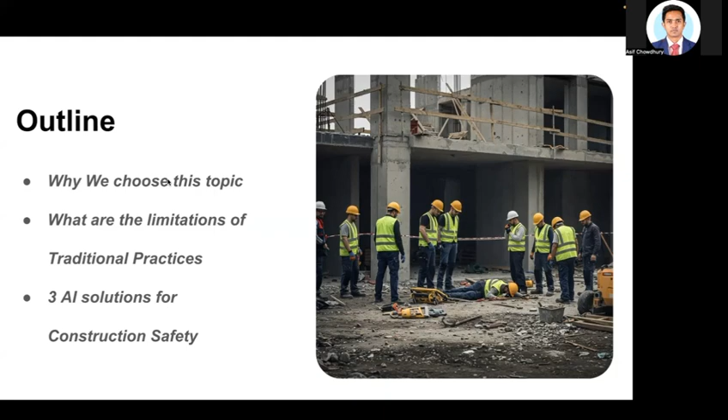In the first part of our presentation, we'll quickly cover why we chose this vital topic, look at the limitations of current traditional safety practices, and then introduce how artificial intelligence presents potential solutions to improve construction safety, particularly concerning fall prevention.

So, why is construction safety so crucial? It's truly non-negotiable for several reasons. Statistically, the construction industry is unfortunately dangerous. It accounts for about 1 in 5 worker deaths in private industry in the United States. Over half of these fatalities stem from what OSHA calls the fatal four: falls, struck-by incidents, electrocutions, and caught-in-between hazards.

Beyond the devastating human cost, the paramount need to protect workers, there are significant financial impacts. Accidents lead to billions in costs from project delays, increased insurance premiums, fines, and legal fees. Safety issues disrupt project integrity, affecting schedules and budgets. Conversely, a strong safety record enhances a company's reputation and builds client trust. The key takeaway here is that proactive safety isn't just ethical, it's fundamental to successful and sustainable construction.

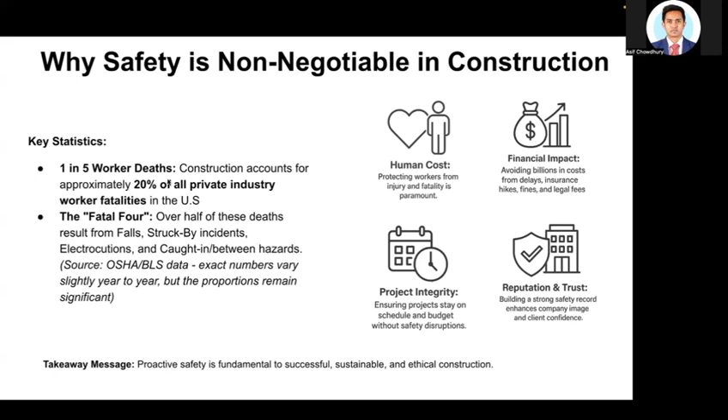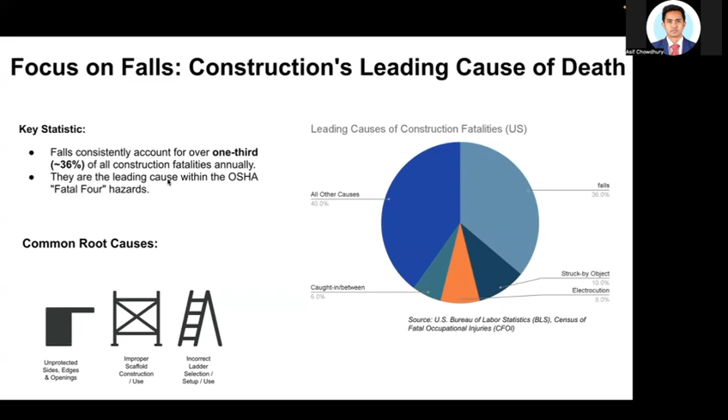Now, the industry isn't starting from zero. Currently, safety methods form an essential foundation. This includes physical barriers like guardrails, manual site inspections using checklists, worker training programs, and the use of personal fall arrest systems, or PFAS. However, these traditional methods have limitations.

Oversight can be inconsistent, manual inspections are prone to human error, and only capture a snapshot in time, not continuous conditions. Training is vital, but doesn't guarantee consistent safe behavior. Furthermore, scaling these manual methods effectively across large dynamic sites and providing real-time hazard identification is incredibly challenging.

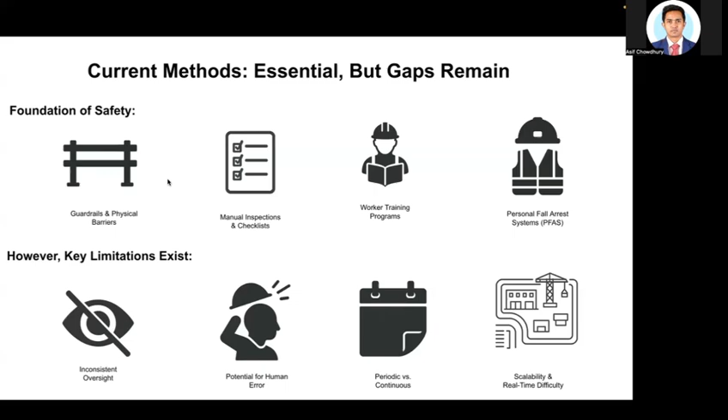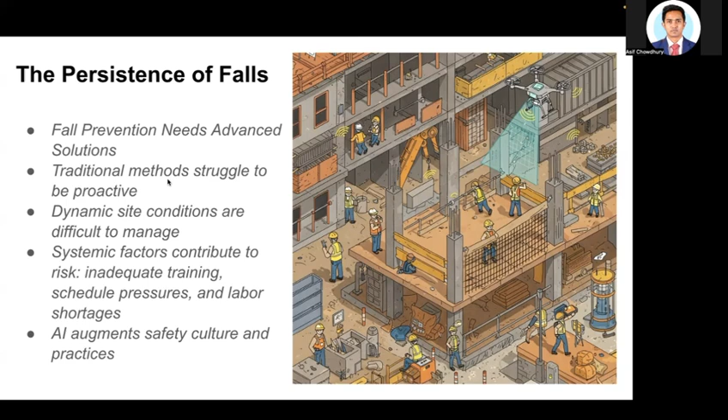Despite current efforts, falls persist. This highlights the need for more advanced proactive solutions. Traditional methods often struggle to anticipate risk before incidents occur, especially on constantly changing construction sites. Systemic factors like inadequate training reinforcement, schedule pressures pushing workers to take shortcuts, and even labor shortages can contribute to the risk. This is where technology like artificial intelligence can play a crucial role, not to replace existing safety culture, but to augment and enhance safety practices.

Artificial intelligence allows for automated, consistent oversight 24/7. The ultimate goal is not to replace safety managers or protocols, but to add a predictive, continuous layer of safety, supplementing traditional methods to proactively prevent falls before they happen.

Having established the critical nature of fall hazards and the need for more advanced solutions, we will now explore the specific artificial intelligence-driven approaches our team has researched, as outlined earlier. I will now hand it over to Mona, who will begin by discussing our first AI solution.

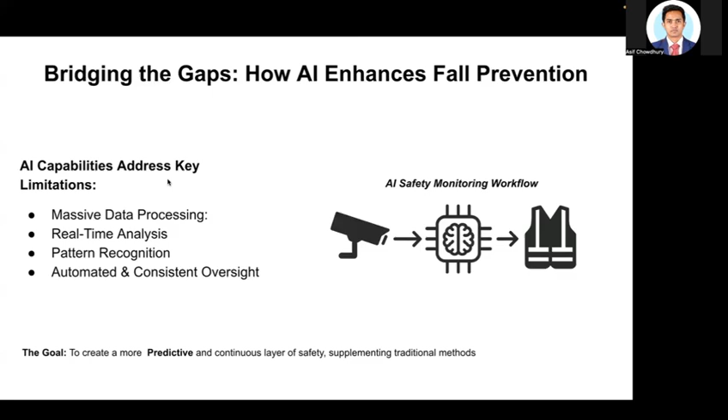Hi everyone, today I'm presenting Everguard AI, a system that's helping to make construction sites safer by using artificial intelligence. Everguard combines technologies like computer vision, wearables, and environmental sensors to actively prevent accidents. Construction is one of the most dangerous industries worldwide, and historically safety has been reactive, investigating after something goes wrong. But nearly 3 million people die each year from work-related causes, and this number shows why proactive systems like Everguard are so important.

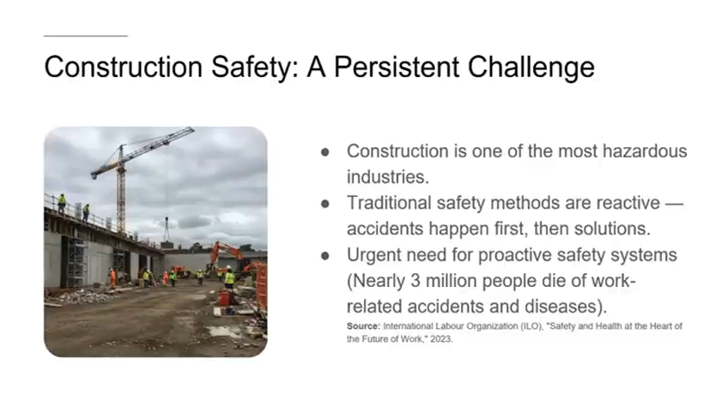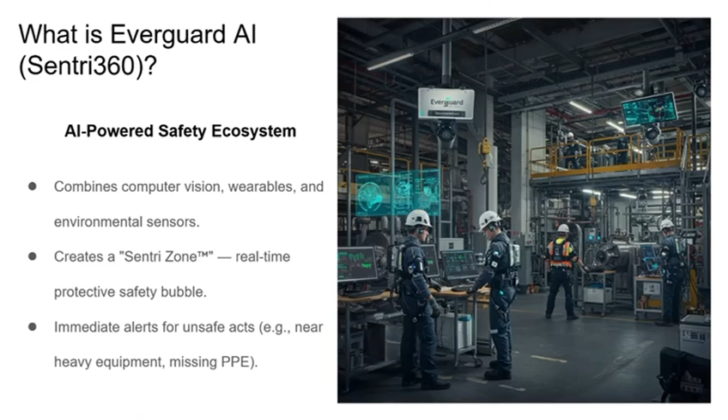Everguard's core platform is called Sentri360. It creates a real-time safety zone around the workers by combining multiple data sources like video feeds, wearable sensors, and environmental inputs. For example, if a worker steps too close to heavy equipment or forgets their PPE, the system instantly detects it and issues an alert.

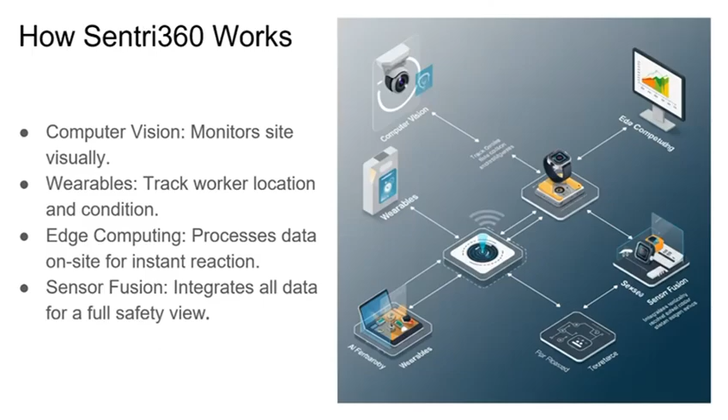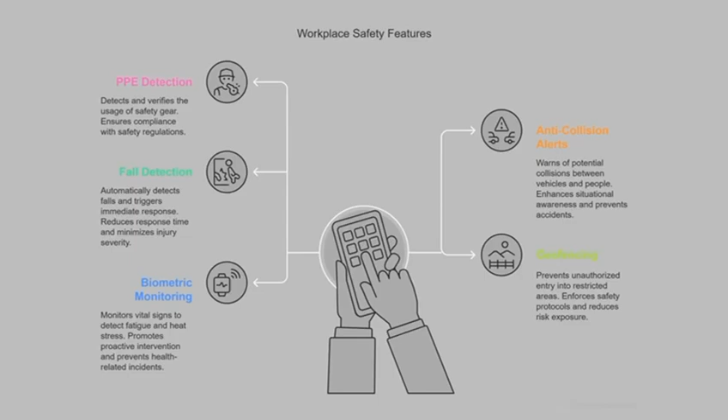Here is how it functions. Computer vision monitors the site visually. Wearables track worker location and condition. And we have instant alerts because we have edge computing that processes all the data on site, and sensor fusion integrates everything into a full view of site safety. This gives supervisors a powerful tool to monitor and respond in real time.

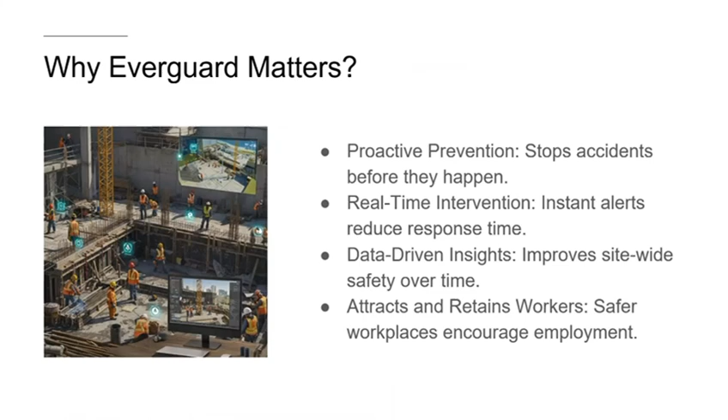The biggest value of Everguard is proactive prevention. Instead of waiting for reports after an incident, it can stop that incident before it happens. It also collects data to improve safety over time, helping companies adjust training or protocols. And in today's market, safer job sites help to attract and retain skilled workers.

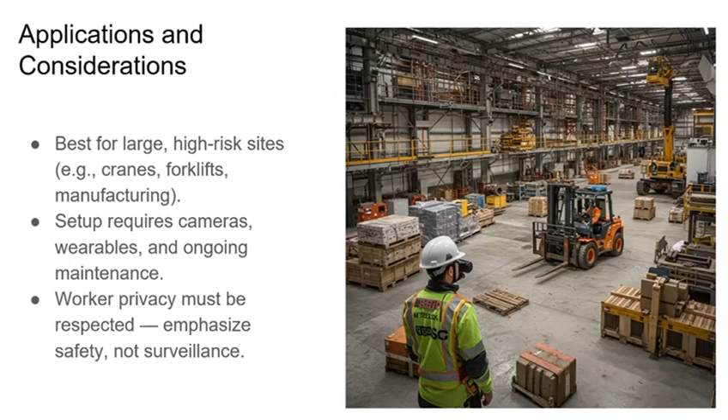Everguard is best suited for high-risk environments like high-rise construction, fabrication yards, or sites with cranes and forklifts. But it does require setup, for example, cameras, wearables, and ongoing maintenance. And because it tracks people, it is important to earn workers' trust and explain to them that it's just a safety tool, not surveillance.

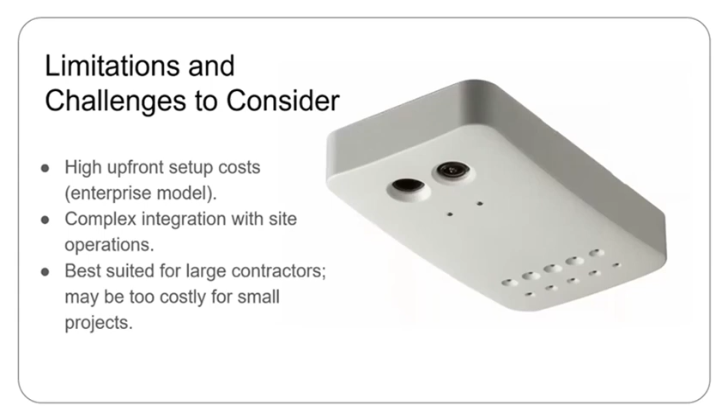There are some limitations. The system has high upfront costs and the integration process can be complex. Smaller contractors may find it too expensive or too difficult to implement on a single project. That's why it is more common in large-scale construction or industrial settings.

To sum up, Everguard is leading a shift from reactive to proactive safety. It uses real-time AI monitoring to protect workers, prevent injuries, and support better decision-making. And as construction continues to embrace digital solutions, systems like Everguard will be key to building smarter and safer job sites. Thank you.

Hello everyone, my name is Joshua. In today's presentation, we will explore how Smartvid.io, which is an AI tools platform, revolutionizes construction safety. We will walk through its technology, use cases, and a real-world scenario.

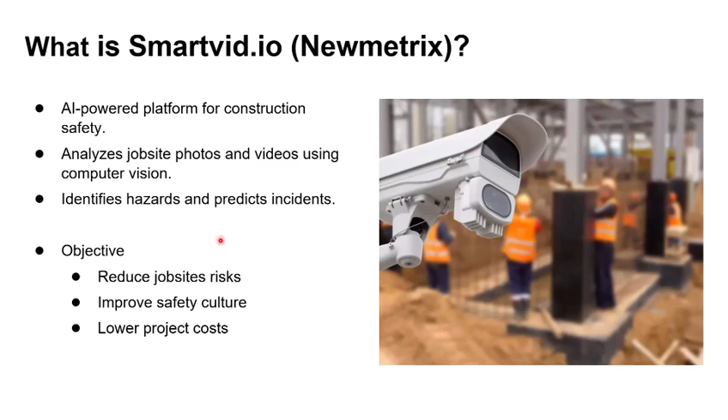So what is Smartvid.io? Smartvid.io, now branded as Newmetrix, uses AI to enhance safety in the construction industry. It scans images and video from job sites to detect hazards early and help teams prevent incidents. It reduces job site risk, improves safety culture, and it also lowers project costs.

Key features of the safety suite of this AI tool: the platform has three major modules: safety observation, safety monitoring, and predictive analytics. Safety observation helps workers log observations, either positive or not. And with these observations, the AI platform is able to detect hazards, like where incidents are likely to happen. So it uses the data gotten through the observations to predict where incidents are likely to occur next.

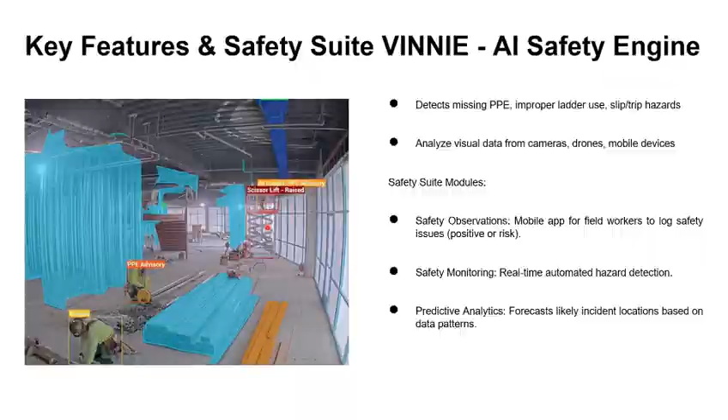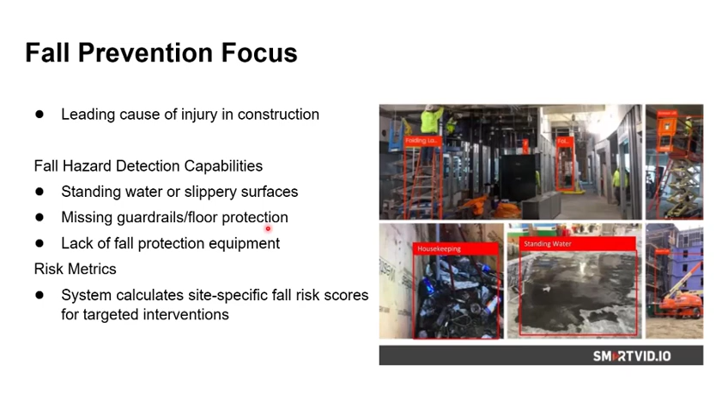Fall prevention focus. So why falls? Falls are the leading cause of injury in the construction industry. So Smartvid.io AI specifically identifies fall hazards like poor ladder use or slippery areas, helping safety teams prevent these incidents before they happen. And the system can calculate site-specific fall risk scores for targeted interventions.

So we'll move over to the integration with construction workflow. One of the strengths of this AI platform is how easily it fits into existing workflows, such as Procore, Box, BIM 360, Autodesk, and the likes. In doing this, it makes implementation fast and cost effective. It reduces the risk of adoption and implementation.

A real-life case scenario is a situation where Suffolk Construction partnered with Smartvid.io to analyze 1 million photos and videos collected across all site projects. After the analysis, it predicted 20% of incidents with 80% accuracy. With further tuning, it detected 40% of incidents with 66% accuracy.

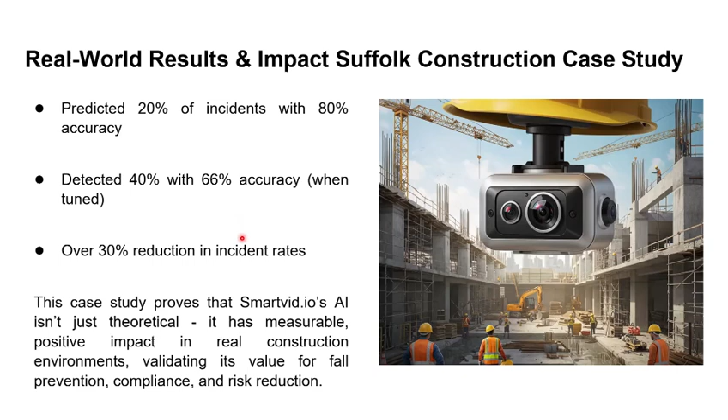Generally, with this AI platform, Suffolk Construction had an overall 30% reduction in incident rates. This case study proves that Smartvid.io AI isn't just theoretical, it has measurable positive impact in real construction environments, validating its value for fall prevention, compliance, and risk reduction.

In summary, Smartvid.io combines cutting-edge AI with practical field integration. It detects hazards, predicts risk, and has proven success in reducing incident rates. Lastly, it is a blueprint for the future of construction safety. I will hand over to my teammate Benjamin to take over.

Thank you. Hello, in this part, I'll be talking about the Labourcrown Smart Vest, which is an AI wearable designed to significantly enhance worker safety on construction sites. Before I move on, let me quickly talk about some of the construction site challenges, as we all know that this industry is widely recognized as one of the most hazardous sectors.

In 2023, it was responsible for about 27% of all fatal and significant injuries. And in the United States, it accounted for about 28% of occupational deaths in 2018, which is more than every other sector. This alarming figure highlights a critical gap in traditional safety measures, and makes it clear that we need an advanced solution like a smart wearable to better protect construction workers on site.

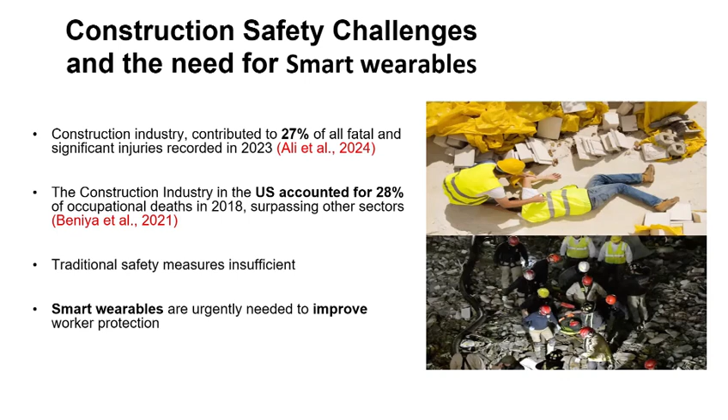Now, I'll be talking about the Labourcrown Smart Vest. So what is the Labourcrown Smart Vest? This smart vest is a next-generation wearable safety device that uses the power of artificial intelligence and IoT technology. It combines a range of sensors, GPS tracking, and AI analytics to monitor workers' health and real-time location.

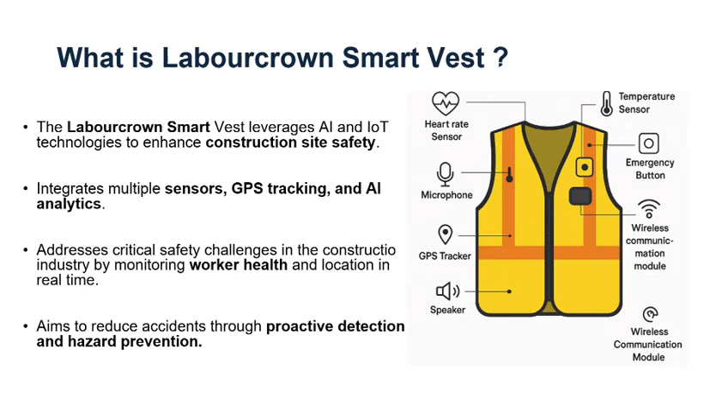This system is particularly designed not only to detect safety risks proactively, but to prevent accidents before they happen. And this offers a smarter and more responsive approach to construction site safety. So let's quickly look at some of the design features of this Labourcrown Smart Vest.

The design of the Labourcrown Smart Vest focuses on both functionality and efficiency. It encompasses and integrates key components such as multiple sensors, GPS tracking, and AI processing units into a compact, lightweight vest. And each component plays a critical role. For example, as you can see, the heart rate sensor keeps track of the worker's physical health, while the temperature sensor monitors for signs of heat stress.

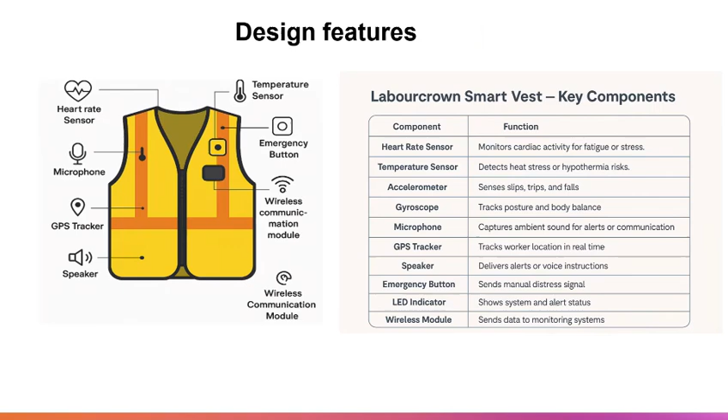Additionally, the accelerometer and the gyroscope detect sudden changes in movement, which can signal a fall of a construction worker or a loss of balance, which is very critical when workers are working at height. And the GPS tracker provides continuous real-time location data, ensuring that the site manager always knows where each worker is. You can track them. And all these things work together to prevent accidents and to detect falls on site early before they happen.

And let's now talk about some of the data collection capability of this particular wearable. One of the key strengths of the Labourcrown is robust data collection. You can gather three main types of data: biometric data, which includes signs like heart rate, environmental data such as temperature and the noise level on site, and location and movement data. And all these things can help identify falls or unusual activity in construction sites.

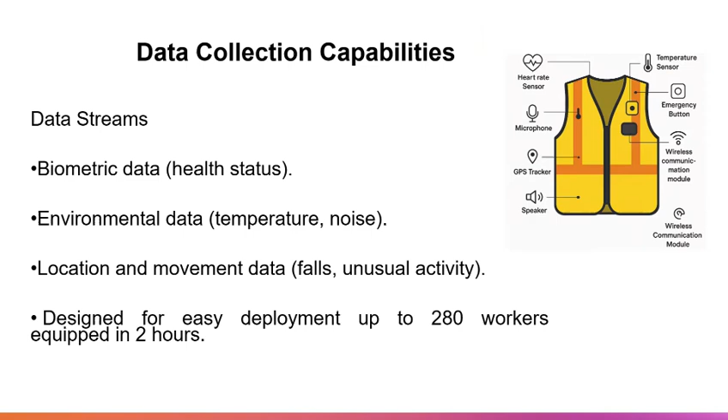And one impressive feature of this is its ability to be deployed rapidly across a large team. For example, up to 280 workers can be fully equipped with this within 2 hours, making it extremely practical and useful in a very big construction site.

And what does the AI server do? It analyzes the data in real time to identify any irregularities or potential dangers to construction workers, such as falls or symptoms of heat exhaustion. And if a risk is detected, the system sends an immediate alert to both the workers and the supervisor, allowing for quick response. And this cycle from data capture to real-time alerts creates a highly responsive safety network. And this can save construction workers' lives and prevent serious injury on site.

Of course, having known this, let's quickly talk about some of the key benefits of this vest. This vest offers key benefits such as early detection of heat stress and fatigue through continuous health monitoring, which helps to prevent serious medical issues of construction workers before they escalate.

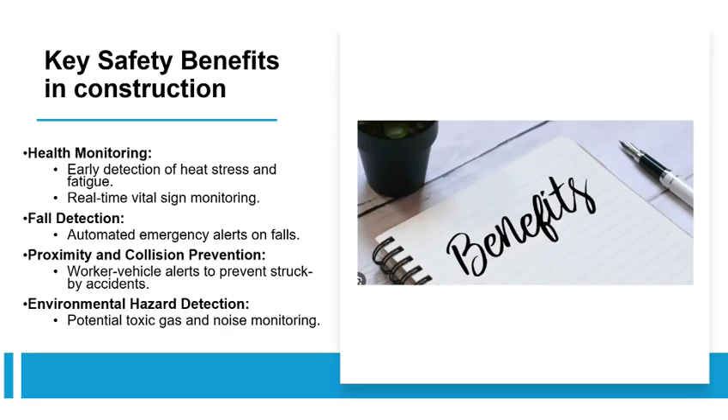And one important thing is the vest has a feature that can automatically detect falls, which can trigger an instant emergency alert if a worker falls, so that the people on site can quickly come to the aid of the workers. And in addition, it helps to prevent collisions by alerting workers when they are too close to moving vehicles or heavy equipment on site.

The limitations of this Labourcrown: despite the advantages, it has a lot of limitations and challenges. One of these is relatively short battery life, which requires frequent recharging. If you need to keep recharging so that we can continuously use it, it's a very big problem. And the system also depends on a stable network, which can affect connectivity when we are working in a remote site. And there is also the possibility of false alerts, which can cause unnecessary interruption on site.

And in an environment where the weather is harsh, the durability of this vest may be affected. And also the continuous biometric and location tracking can raise privacy concerns. And one thing I see as one of the biggest problems with this vest is its high cost. It can pose a lot of barriers for smaller contractors, and proper training is also required to ensure that each worker on site can actually understand and accept this technology.

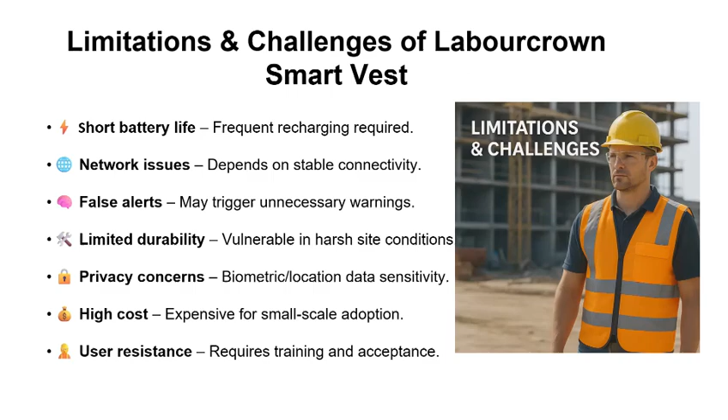Before I conclude, what is the key takeaway here? The Labourcrown Smart Vest is a very important advancement in construction site safety, because it uses AI and wearable technology. And while there are still challenges to address, its ability to provide real-time monitoring, proactive risk detection, and immediate alerts marks a major step in supporting workers' health in construction sites. And I believe that this smart vest will enhance construction site safety, and also ensure that workers' health is not in danger.